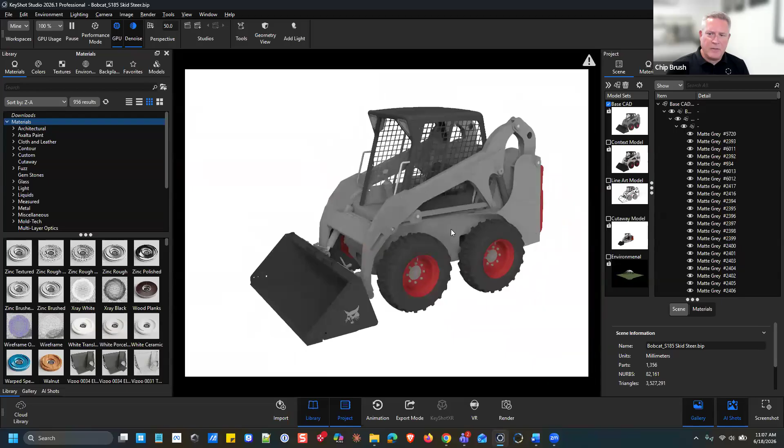Okay, so let's look at how easy it is to begin that process. It's brought in with some fairly muted, mundane textures and colors from the CAD application itself. What I'm going to do is show you how we can use our library, here on the left. You'll notice I have materials - any number of hundreds of different industry standard, scientifically accurate materials, things like zinc and polished stainless, painted surfaces. I can even say, if I need a painted surface, let's go with red.

Let's try to do a red paint. I can find a lot of different paint options, including things like cutaways - we'll look at those in just a minute. I can take a textured red paint and apply it to part of my model, that red that is so clear and pronounced for most of the Bobcat world. I can look at that red paint now and dial it into just that color and value that I might need, very quickly and easily with simple drag and drop.

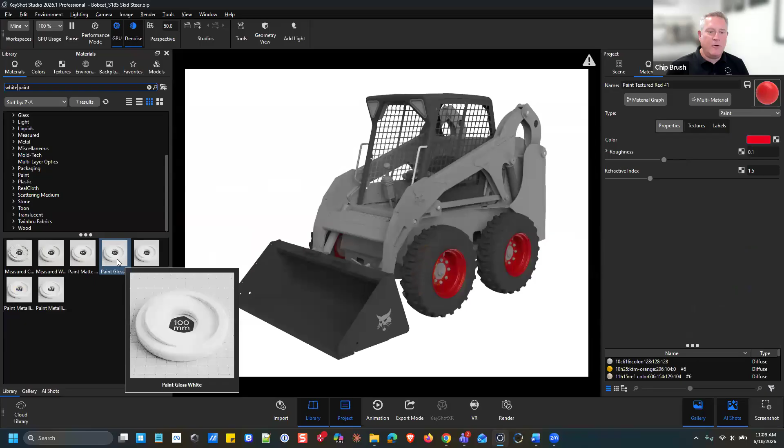If I need a white paint, I can go in and find that white gloss - yeah, there it is, and that's the one we mostly can identify with. I can drag this in and bring in all the nice color, texture, highly reflective surfaces to every part of this geometry.

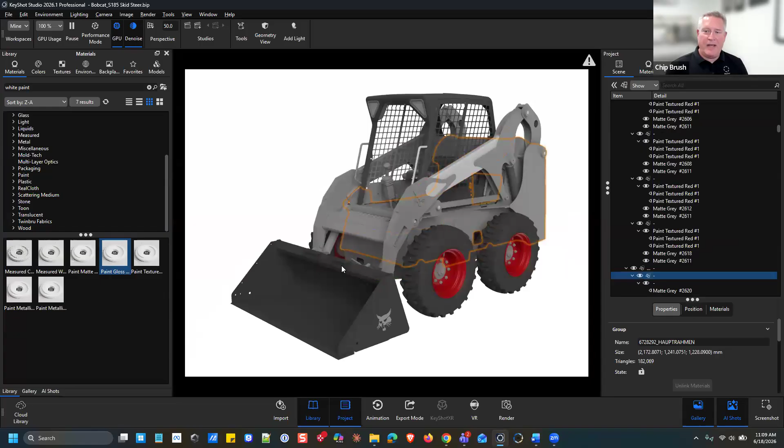But what if I want to apply it to everything? I could go to the project over here on the right, find that part of my project, grab the very top of my geometry if I need to, or that piece that says I want to apply this to the whole frame. I then can apply it here as well - now I'm applying it to big supersets of my structure. So very quickly, you can go from 0 to hero and bring your entire CAD model to life in just a few steps.

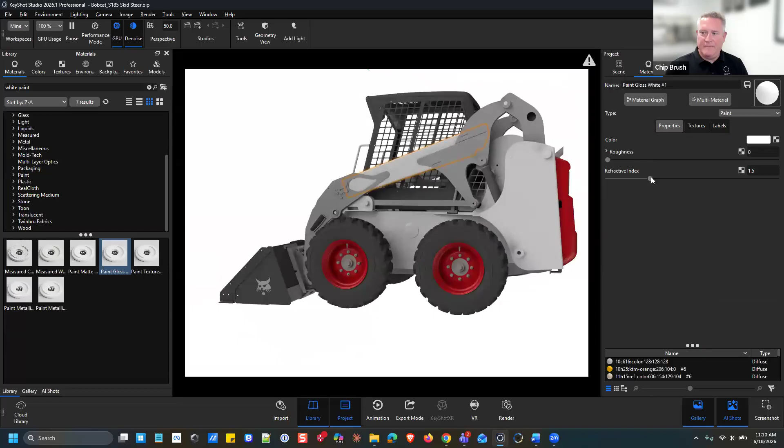So I really wanted to show you this ease of use in the process of tweaking, refining, even doing things like changing the roughness, the reflectivity, the refractive index of the entire paint and the part you're working with, to give just the reflectivity, color, and texture you may need in this context. It's a super easy process.

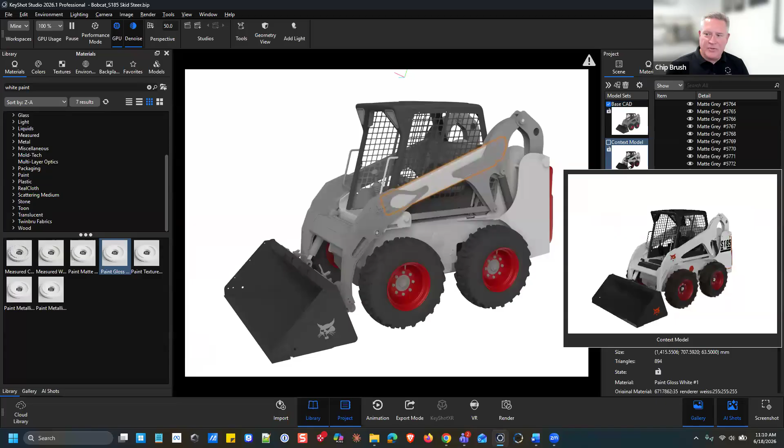One aspect of how we break up a KeyShot project is what we call model sets. I'm about to pull a Julia Child on you and jump over to a fully baked scene - here we already went through the process of applying matte materials, textures, colors to all parts of this design. You'll notice it's resolving up in real time. I've even applied things like distortions, colors, and scratches to my scene, giving lots of detail, color, even dirt on the tires, to give a realistic look for things like product marketing, websites, and publications.

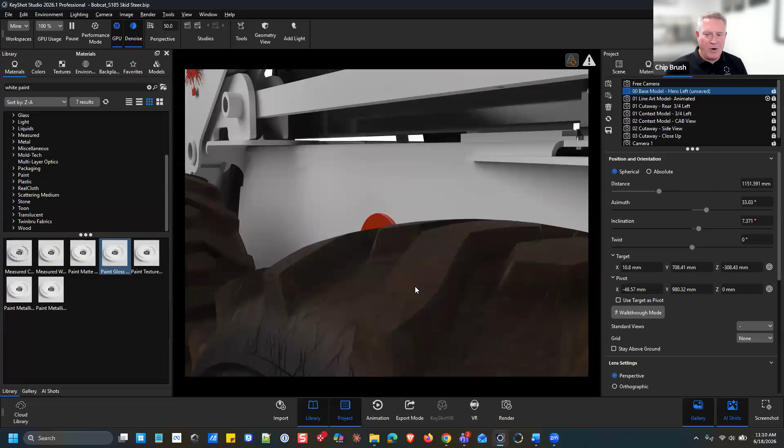In that context, I can go to our material graph, which is very helpful. A material graph is a detailed view showing all the things that went into making that rubber tire look as natural as it is. This node-based editor gives us all the plastic, all the colors, distortions, textures, noise, and scratches that are applied in layers on top of that geometry piece to really give it the natural look you're looking for in the scene.

So with that, we can do color variants and what we call multi-materials. I'll go back to that same part we saw earlier. You'll notice when I double click on it, I can see the multi-materials, which is very easy to manage.

So if I have CMF opportunities, we know we're going to go to market with a white, maybe a dark gray option, a red, or maybe even a yellow. I can see all those combinations of colors that are approved, identified as options we may want to go for marketing with, for every part and subset, and pick exactly the color combinations I want to render. So really helpful to be able to build and establish all those.

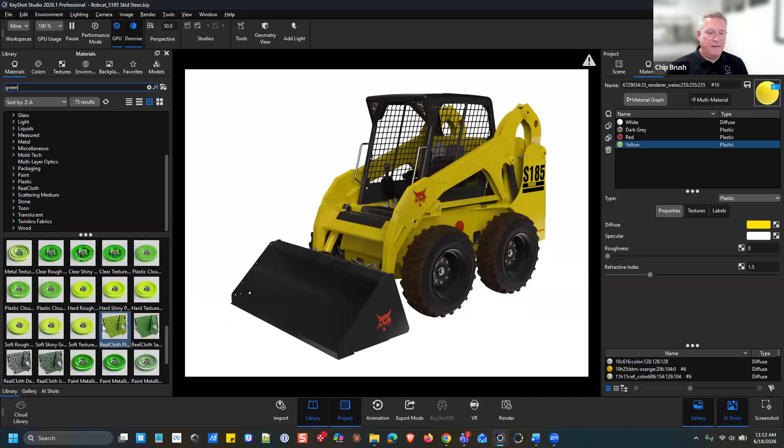And then I can actually go in and say, if I want to do a green, we'll find a nice green, and we can pick an anodized color. It's probably a little harsh, more of a hard shiny look. We can bring that in, dial that into and change that plastic color, and really change all the characteristics to get exactly what we might want to see as a go-to-market option, to spitball with the team and see if that's something we wanted to do. So really easy to develop multi-material options and refine that with the team, very quickly.

Okay, let's go back to another model set. These are how we really differentiate use cases and scenarios. And I'll actually run a quick animation.

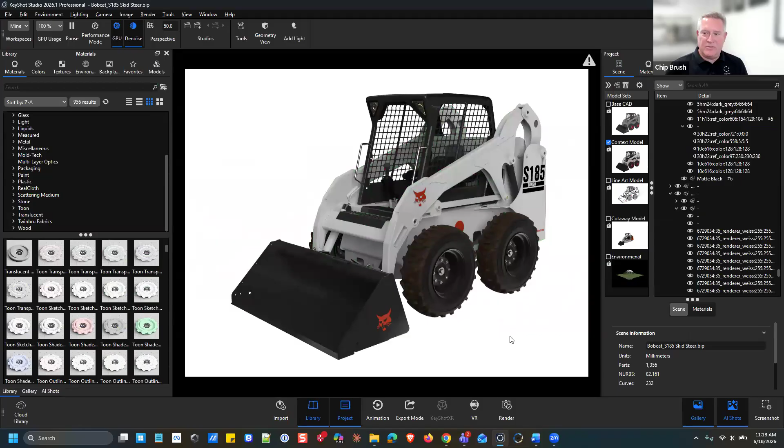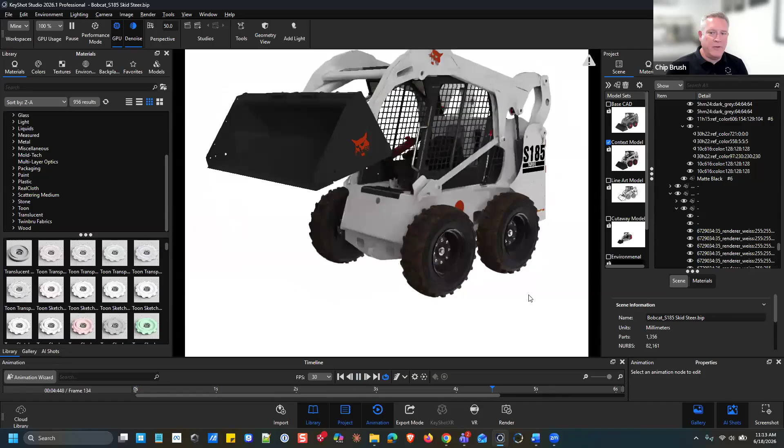One aspect of KeyShot, which is super helpful, is to provide animation. So if we need to see range of motion, how parts are assembled, linkages between those parts, we can inherit a lot of those things from the CAD application. If you have linked parts that run in context here, for something like the bucket movement, you'll notice the hydraulics, the armatures for the control areas, all linked together in the CAD application, brought over into KeyShot so we can run those with all the textures, colors, materials, and environment lighting that you might want to see.

Great for those quick videos on the website for marketing, as well as for engineering and even safety. So great to be able to see we can do that as well.

I wanted to also show you one additional piece which I think is really great. This is when you get into a change, needing to use this for a different purpose. The line art model gives us the use of something we call a toon shader, and a toon shading can actually be applied. You'll notice there are lots of toon opportunities as we're looking at different fills and things that make up what we call more of a documentation, tech specs, and EPUBs type outline of the actual drawing itself.

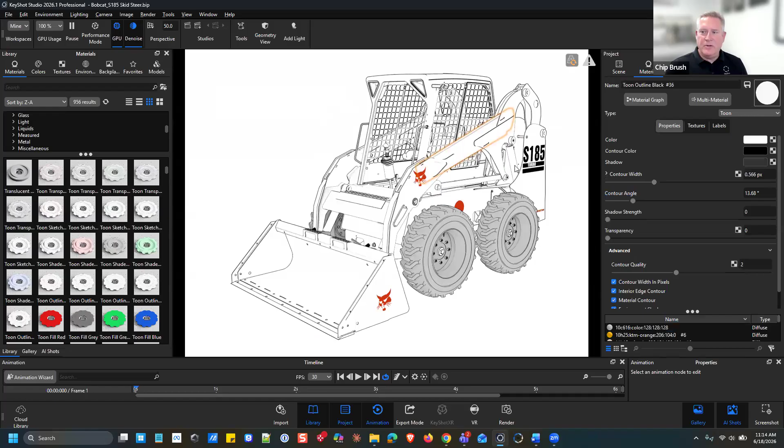And what you'll notice too, if I look at that toon shader, is the ability to apply it to the entire model and get a very interesting review of the model in a far less high fidelity view. We can very much tailor this to the exact use case you need for documentation or design. I can change the contour width of the outline, the shadow strength to give it some depth of understanding, and even what is called transparency.

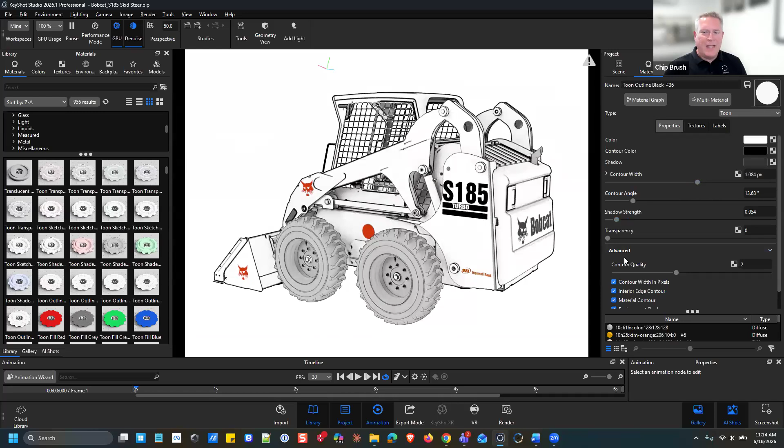And it is probably what you guessed it to be. If I need to really take the skin of this model and start to break it down, I can show you the bones underneath, all the subcomponents and sub-assemblies making up my model in real time. Really great for doing things like exploded views and even animations to show what's going on under the skin.

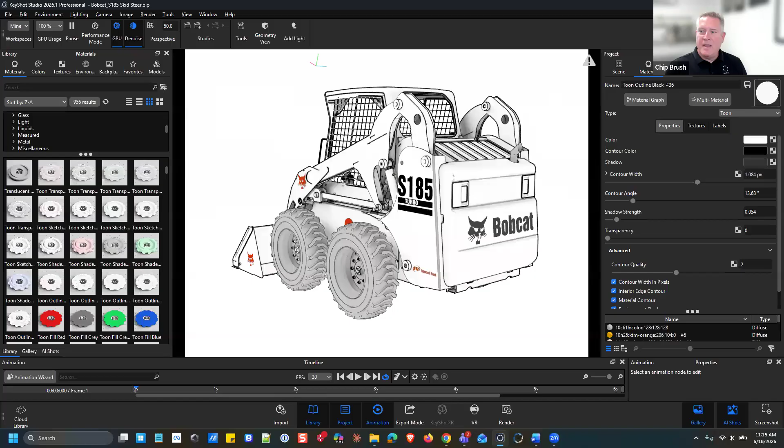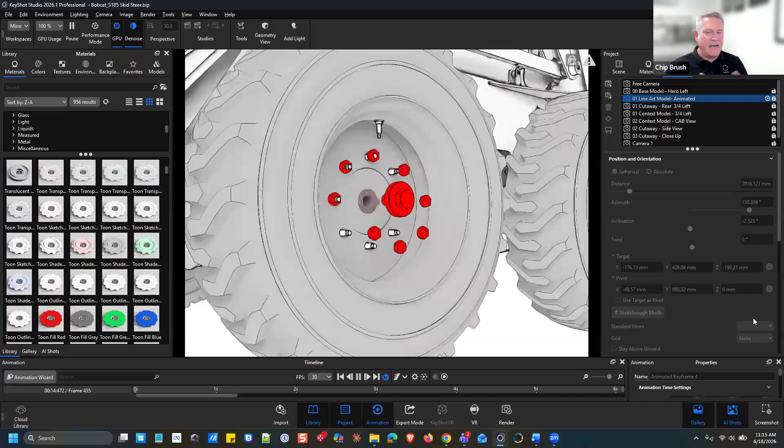And then we can do some interesting things here with those same animations, which is a lot of fun. This is an animation actually built in KeyShot, not brought over from the PTC Creo model it came from. What it can do is create an opportunity for me to build this out as, let's say, an exploded view, a walkthrough to show how the wheel assembly is created, maybe for maintenance activities or assembly diagrams. Create an AVI to show people doing tire changes quickly how you can do that easily. All different use cases for the same CAD model.

So we're using different use cases, different functions, all using KeyShot to really take this to market for all the helpful subsets you might need for developing those workflows for different parts of your business on the launch of a new product.

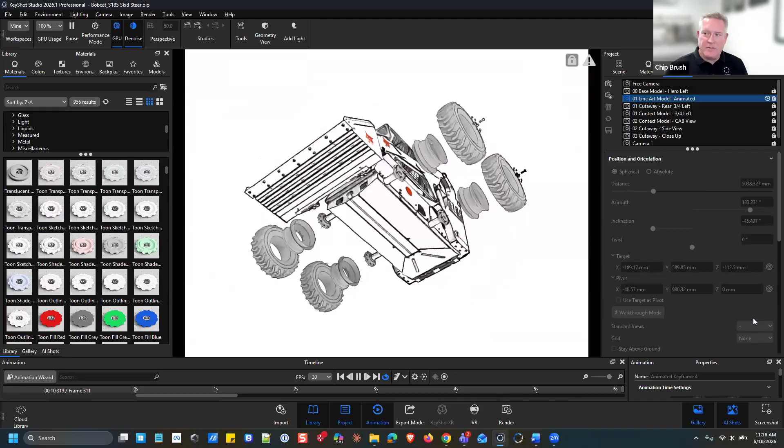All right, so let's switch again, and we're going to go down to... I'll go back to my main camera one more time.

Just so that we don't forget, remember to touch on all the AI, some of the backgrounds. Yeah, sure will, I'm going to do that at the end, actually. Thanks for the reminder, though.

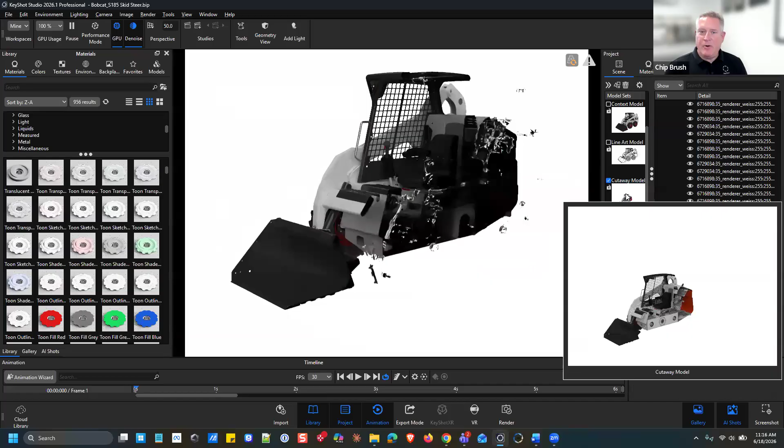Appreciate it. We're going to go to what we call the cutaway model. This is a great opportunity for us to do a non-destructive review of the KeyShot model that we brought in and really bring in all the vantage points that might be helpful.

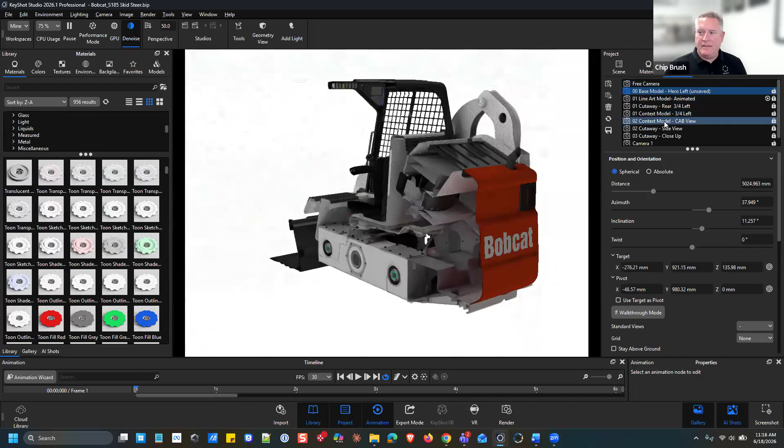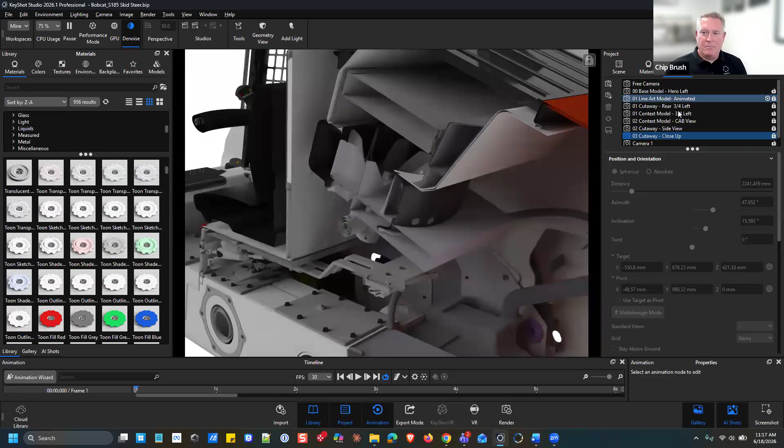I'm going to change cameras. You'll notice we have a number of different cameras here, so if I'm looking at the cutaway, I can see a side view, and I can see a close-up view of some subcomponents to show the strength of material, the subassembly makeup and design. So you don't have to physically section your product in the studio to give your buyers and engineers all the deep detail they need to understand the makeup of your product and the assemblies. It gives you a ton of great opportunity to break that up, and even in this context, which is super helpful, I can back out here a little bit.

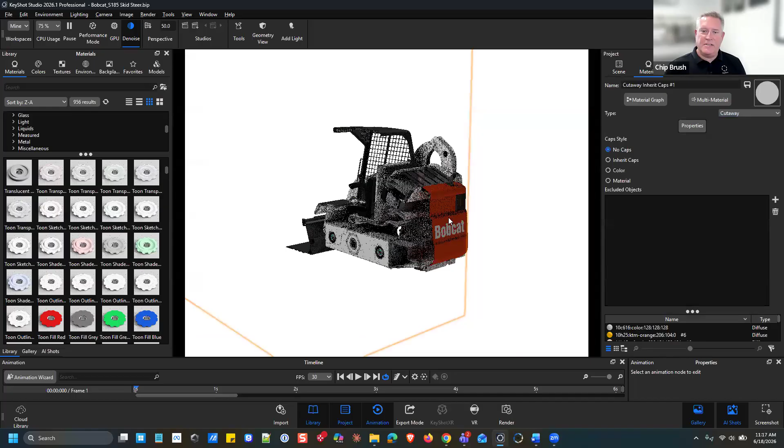Cutaways can either be selective on what you cut away, and I'll show you how this works. We actually have a cube component that makes up the cutaway function. I'll double click on that cube. What you'll notice is it's highlighted here. It's a clear cube, and you can use different geometric shapes as part of your cutaway function - think cylinders, think flat planes, obviously cubes.

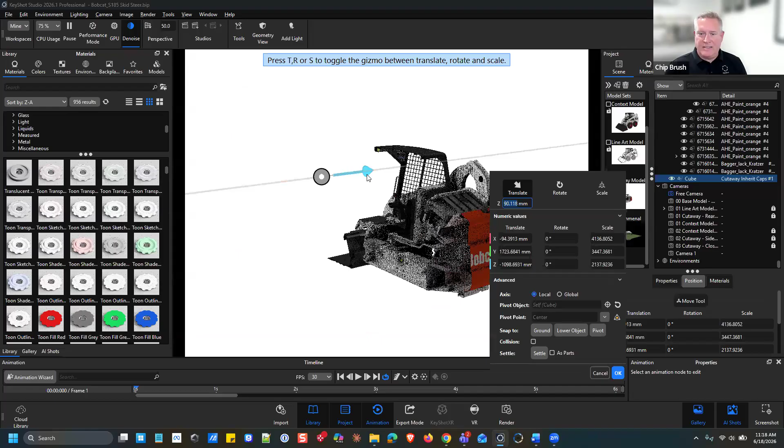We can do that, and you can move those cubes, which has been very helpful. So I could say, if I need another plane of access, I can move that particular cube and see just what I might need as part of the cutaway. You'll notice I can see just the depth of cut to get exactly the detail I need to expose. And when I do that, I can even change what's exposed or what's kept intact as part of that model.

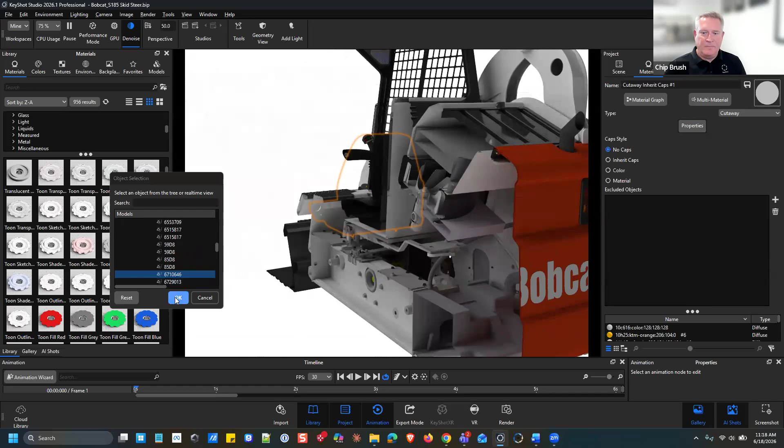So let's say I need to build an exclusion in this case. It'll give me an object selection menu. I can pick it out of the space, say I want the seat to be intact, and there you go - now my seat is fully intact and excluded as part of the cutaway. Or maybe even something like the bucket itself - I can pick a part of the bucket and say, make the whole bucket excluded from that model. Now I've got the full bucket as well as the full seat, but it really brings the rest of the model to life in that cutaway process.

We'll let that res up for a second in real time there. So lots of opportunity to show some real clear detail on what's included and what's under the skin for this particular Bobcat model.

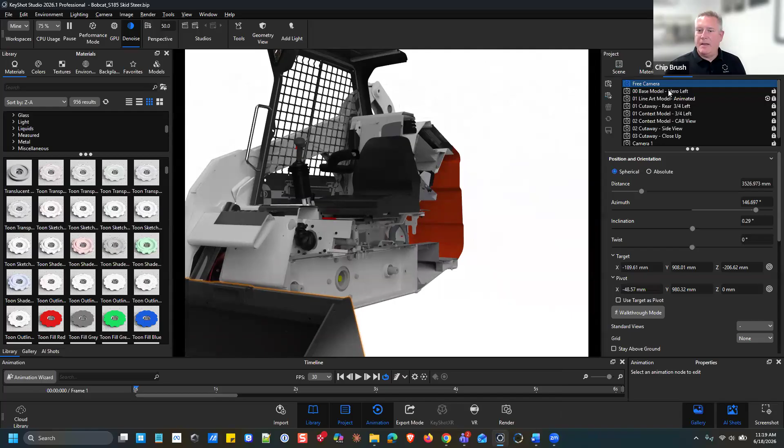Okay, so the last thing I wanted to show you - we'll go back to our context model just for a moment. And we can actually bring in what we call our environmental. This is going to be interesting because what it provides is a new layer of context for how you may want to take your product shots to market.

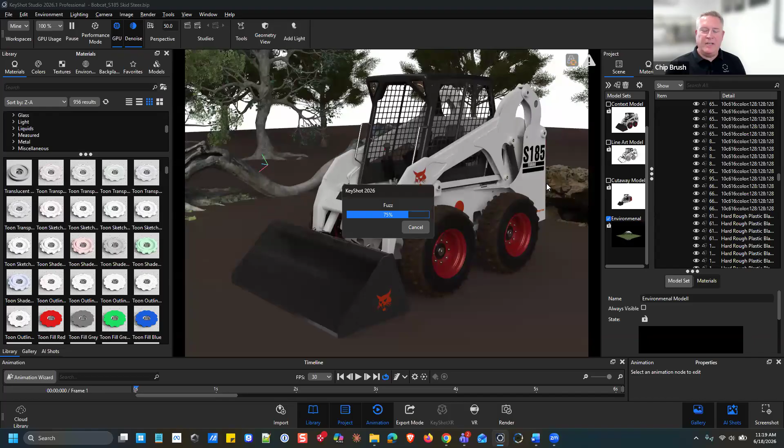So I'm going to turn on my GPU here, let this res up for just a second. And what that'll give you is the ability to really bring in lots of other geometric shapes, backgrounds, objects, even things like HDRIs - those high dynamic range information coming from all the grasses, all the geometric shapes, even things like rocks in the scene. But we can even bring in other environments too.

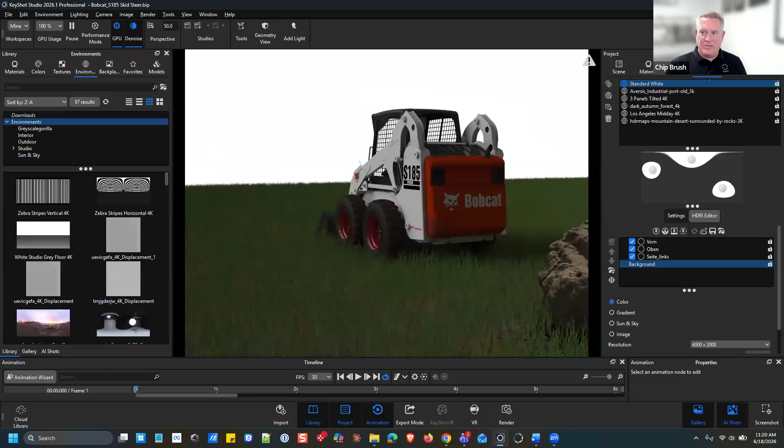Like an environment here, put it in the scene of choice. In this case, we've got a nice high definition background. And this is bringing in all the real-time lighting information that you'd expect to see from those very expensive cameras that can produce all those effects that we need to see of coloration on my model, midday lighting, things like that, to give me just the sort of look I'm going for at any particular environment. And all these can be used in context of those same animations we talked about as well.

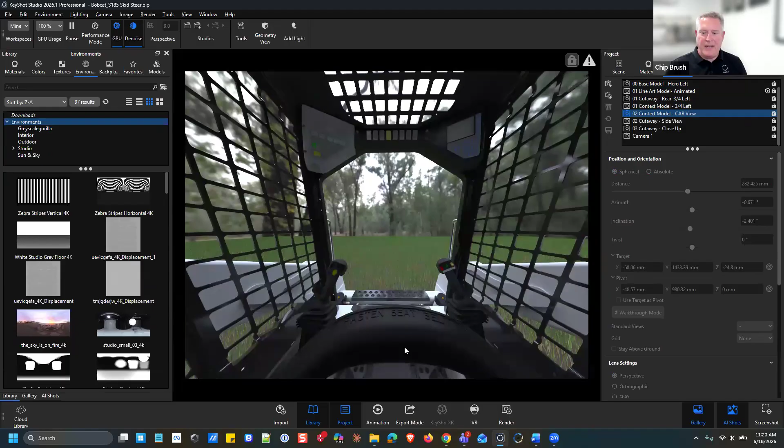So I could even go to a different camera here. Let's say we wanted to be in the context of the cab view. So I can then do the animation here. We'll bring up our animation pane again, and I'll run the bucket here. So you can get really a first-person perspective view in a real-world lighted environment, in the field doing work to understand what it looks like from the user's perspective. So now I can actually see this in rotation to see all my tolerances, where my controls are.

I can see a lot of detail to really help how this experience would look like from a first-person standpoint. Lots of great opportunity here as well. So you've got lots of benefit here. You'll notice even I've got a patch where the generated grass is just removed underneath the bucket. So you really can have a lot of detail shown with very little work. It's really great to be able to see this in real time very quickly. Not a ton of work to get here. The ease of editing is super quick.

So lastly, I wanted to close with a little bit of AI shots. AI is obviously part of our world, part of every application these days that's keeping up with pace, and that's what we've done as well. We've introduced artificial intelligence into the system. It's very important to mention that our AI integration is part of the workflow where it looks at the model itself and what you can do in context of the geometric shape. So it actually looks at and understands the context, geometry, and the shape in the real time view.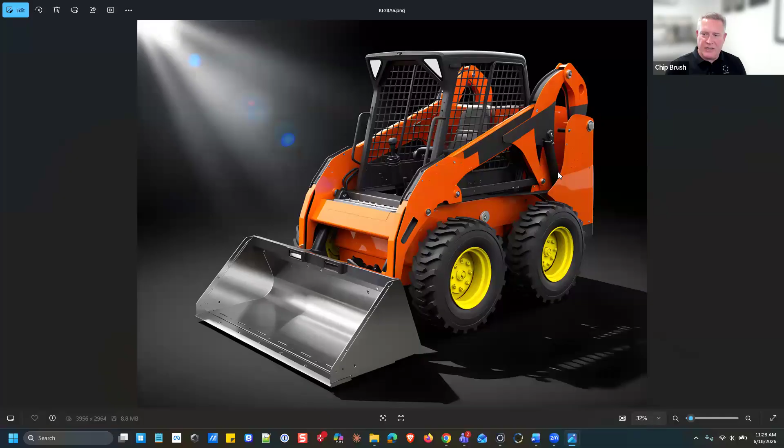I've even got a few here, like if I go ahead and open that up, we'll double click just to show you. It gives you a good high resolution image, and my prompt obviously included things like an orange and black colorway with some yellow wheels and a polished stainless bucket. So a lot of great opportunity just to get some quick ideation shots involved in your dialogue with your design team and your marketing team to say, hey, is this the kind of thing we're looking to create? Then you can take the time to go through it and really polish that with KeyShot and make it beautiful for your e-commerce pipeline, your product documentation, and things of that nature.

Additionally, we've got the background feature I mentioned, so we can create those in-context shots really quickly, even doing things like excluding how the AI is either encroaching or coming over our geometry, to show the grass coming up around. This was a very quick and dirty AI shot query I gave, a command prompt, to build out just a quick in-context shot to be able to share with my team. And then you can continue to develop that.

I wanted to mention we even provide — this is maybe a lesser known function — a prompt assistant that we developed in AI shots. Our lead trainer, Don Tuttle, built this out for our customers to be able to say, hey, I'm looking to create some really dynamic environments.

Here's some great ways to do that restyling and background generation. Imagine's third mode is just really more of an exploration mode, to create some unique and very detailed backgrounds, backplates, things of that nature, to give you some great guidance on how to use AI shots to the best advantage in your workflow.

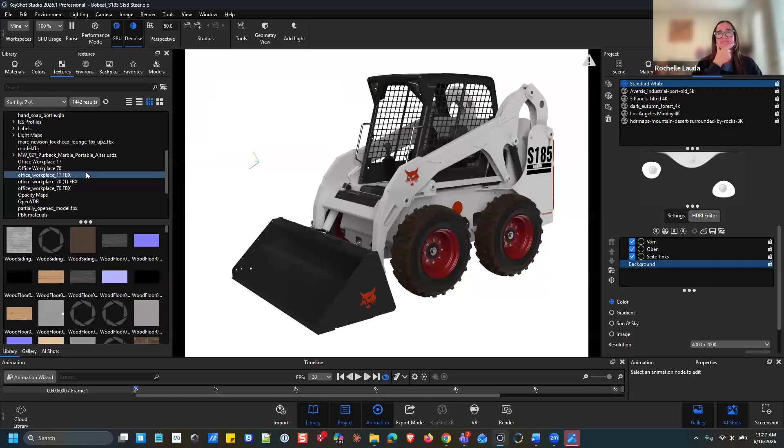Another question came in regarding the type of computer you're using to be able to utilize the backgrounds and everything. Great question. This is almost a gaming computer, but very much design focused as well. It's an Asus running localized graphics processing with an NVIDIA RTX 5090, which is very important, especially for the localized AI shots running on the system. This is running all local, not pushing off into the cloud, so know that's the hardware that would probably be recommended. I'd say shoot pretty high when building out your rendering system. This is running 24 gigs local graphics processing with 92 gigs of system memory, so it's a pretty powerful laptop. We can share that with your customers when they're looking to spec out what a rendering rig might look like, whether in a tower or mobile platform, so happy to help with that.